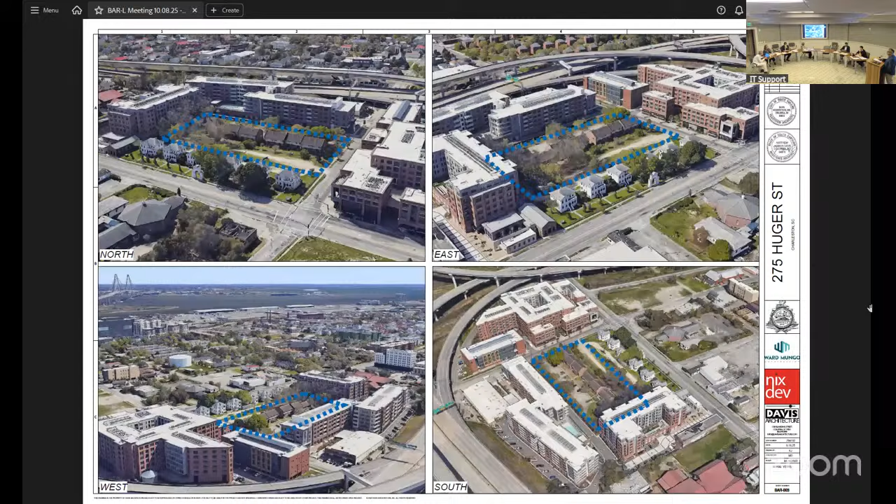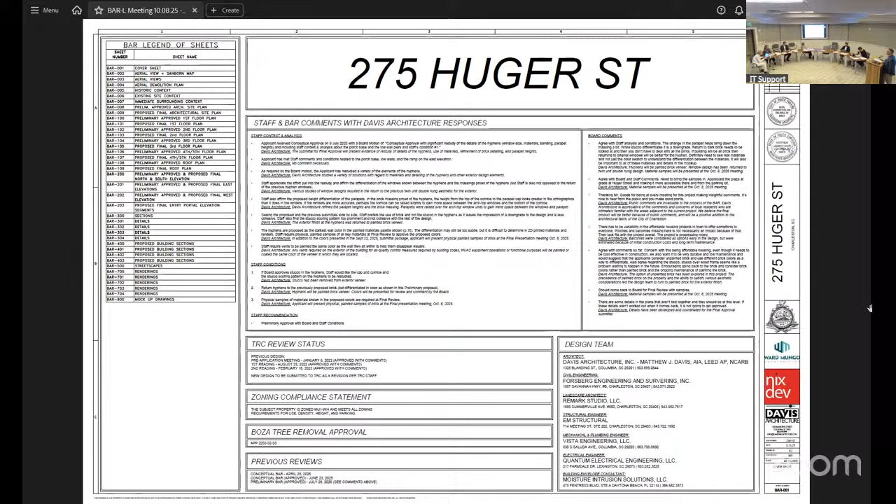So, I guess this is not... it's capricious. Lawrence, can you go back to the front more, let's go through this. Can you go back to page 1? Thank you. Yeah, thank you. So this is not... okay, that's fine. All right, well, you can just kind of take a couple seconds on each slide.

These are the aerial shots, the existing conditions, some inspirations of the architecture of Charleston for the building. Probably a bigger inspiration is the six residences that front Meeting Street that this structure will sit behind and really serve as a backdrop for these homes. These are the immediately adjacent structures flanking the other three sides of the building.

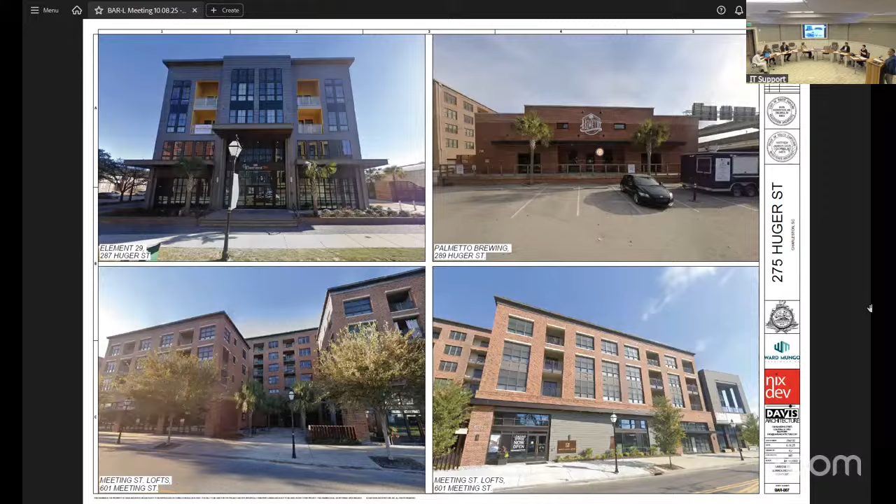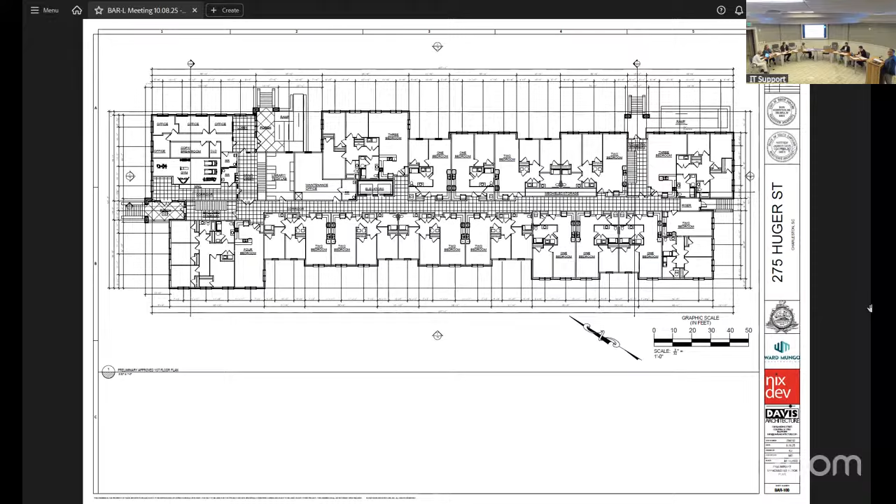So the next 10 slides are basically the preliminary submittal, and then the colored slides represent the final submittal of the floor plans of the building. So you can scroll through those.

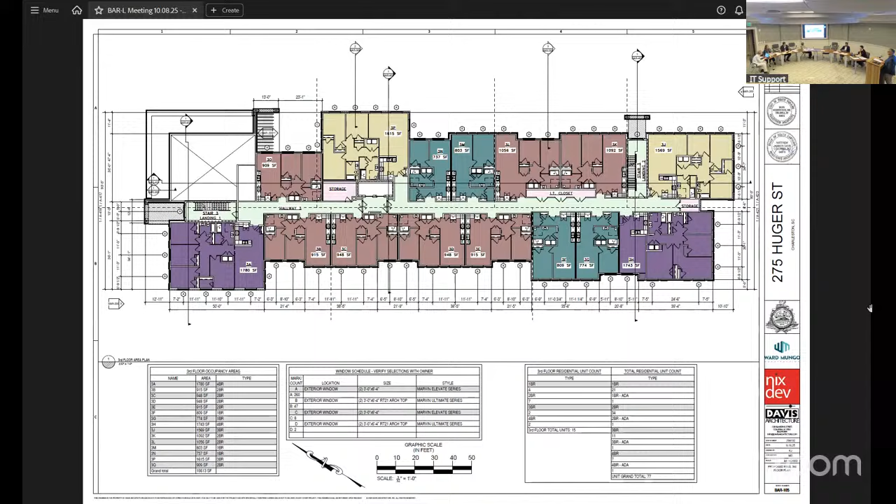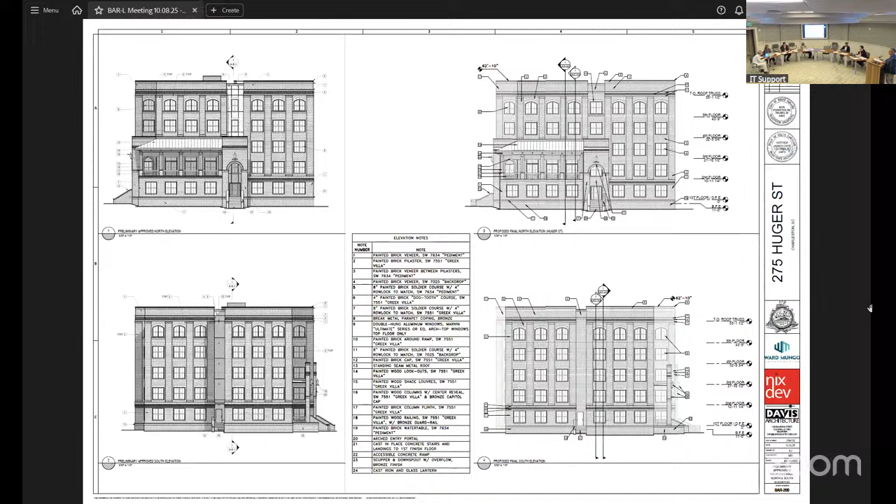So those are studies of the roof plan. That's fine, you can keep going. The next couple slides are the before, the preliminary submittal of the elevations. And then on the right of this slide, are the elevations associated with the final submittal. The next sheet, and then that following sheet, are the long facades.

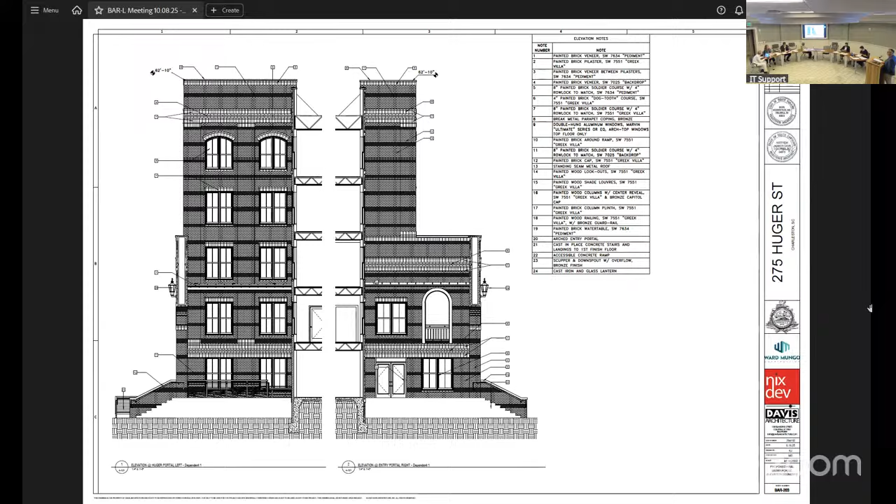Keep going. Some detailed elevations. We started developing more elevations that aren't necessarily visible on the primary four sides of the building. These are the full wall sections, and then I believe that adjacent to the slides following this are basically details of those sections, as we've developed the construction documents to get ready to submit for permitting of the building.

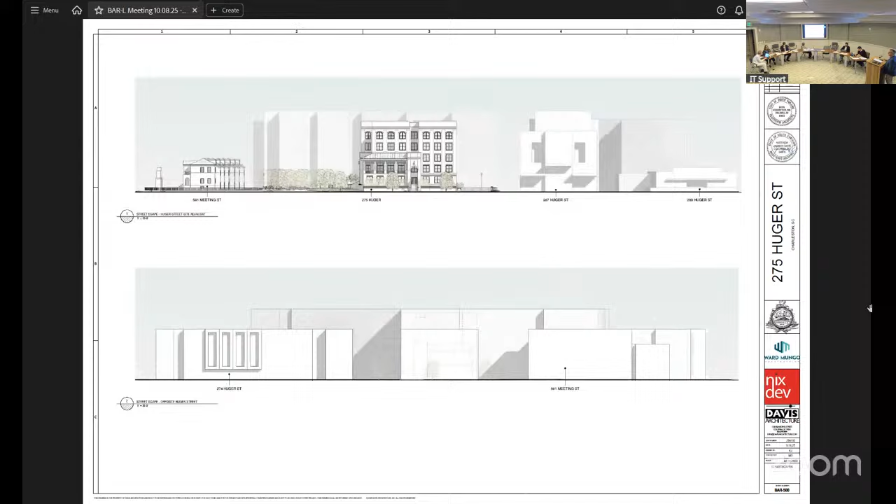And then after this, I believe the final slide for the presentation is the, well, there's some building sections. That's a street elevation.

They're all before and after renderings. So the renderings on the left are the preliminary, the renderings on the right are final submittal. There's a few of those slides. Again, on the left is preliminary, on the right is final submittal.

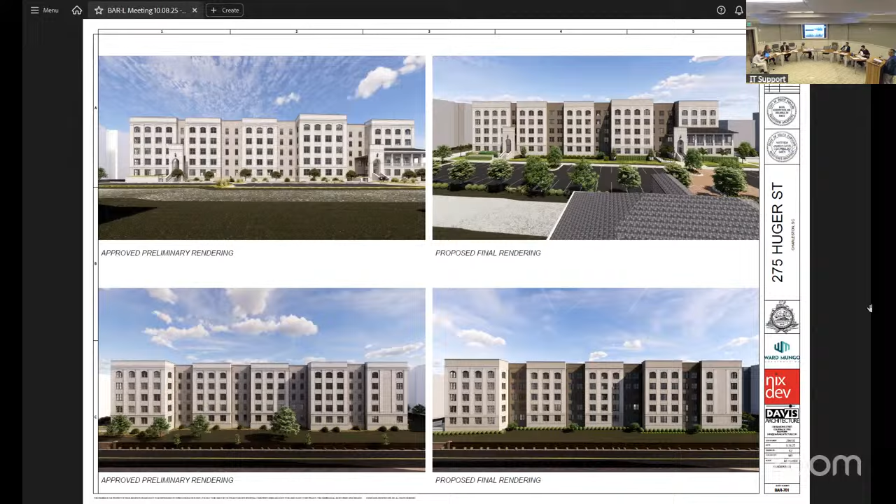And that's the Meeting Street facade. These are all final images. The Meeting Street facade, I'm sorry. And then the corner facade, the rear third entrance into the building is the bottom left corner. The lower right is what will probably be the primary resident entrance off the parking lot, and it's adjacent to the resident retreat community space up on the second floor of the building.

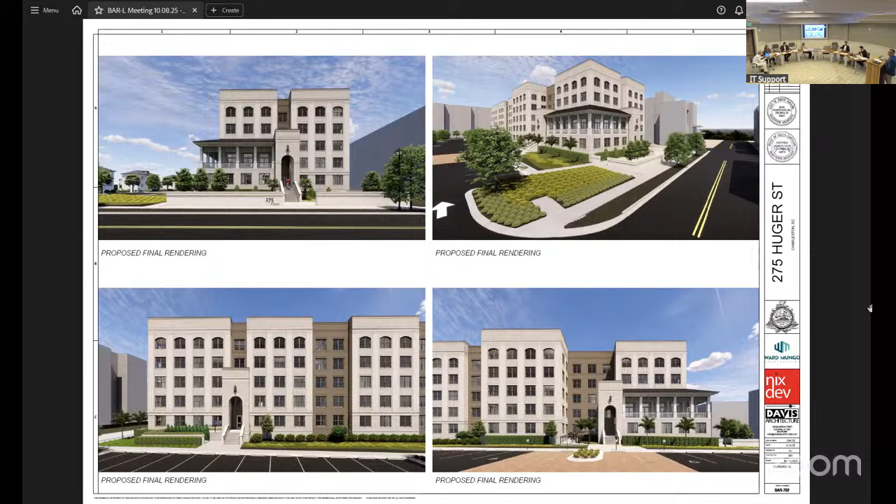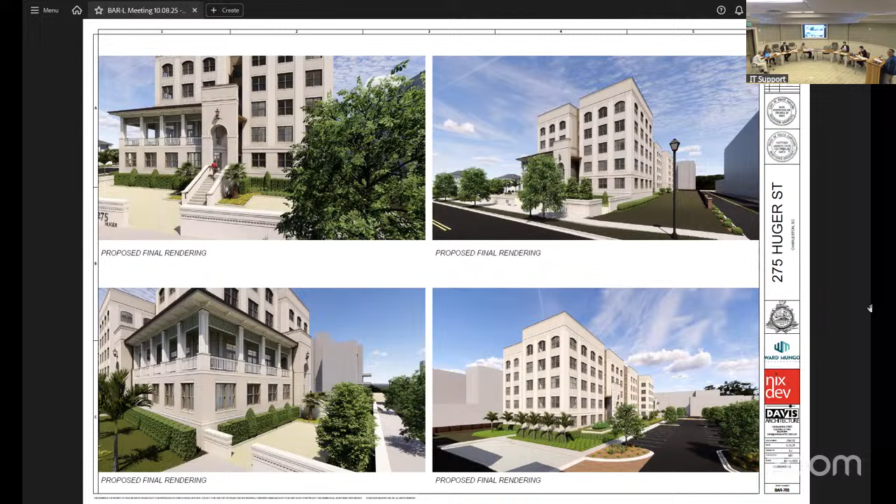A few more renderings of the building. And then this is the final slide for the final presentation.

There is an appendix that follows after this, but it is basically construction details. This is the proposal for the mock-up that will go in place on site. And with that, thank you for your time. We're in acknowledgement of the reality of the timeline of the project. We appreciate you considering this, and we're seeking the final approval by the board. Thank you. Thank you so much.

Any questions from the board? Very quick one: is the top portion, like the parapet, got taller? Okay, yes, as in the development, I believe that may be addressed in staff comments. Actually, it did, in the study of the construction details and the dimensional properties of the brick, the string course actually got a few inches thinner, and the parapet got a few inches taller. So yes, it is a different proportion.

On the lower right-hand corner, you can see especially that it's a little different than the left. I believe that is one of the comments staff is going to address, an issue of reducing the parapet 12 inches in height to return it back to the original proportions. Okay, once again, that was a function of the development of the construction details. Thank you very much. Any other? Yep, go ahead, Mr. Trainer. Comments. Let's go to BAR 501, please, Lawrence.

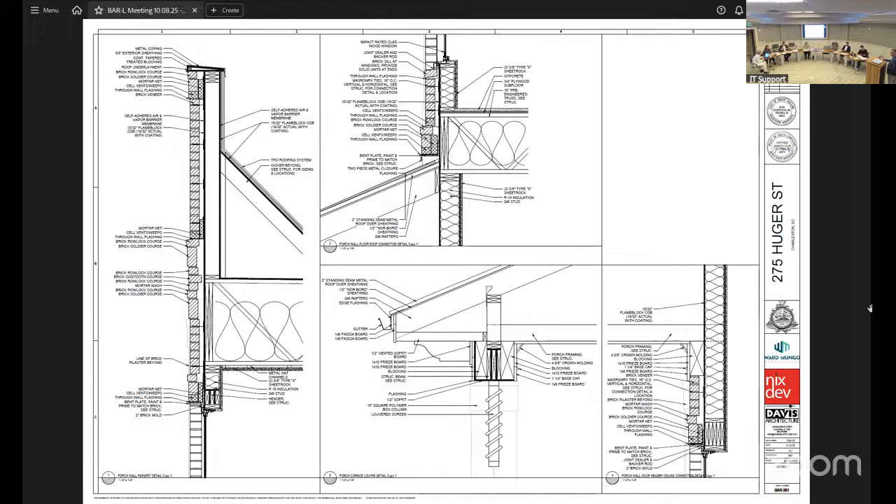It's two different Marvin lines. I think the Ultimate is the arch top windows. All the straight top windows are also a comparable Marvin product. I can't remember the name of it, but both of them are clad. They will come with the same pre-finished color.

Do you see those as the grids between the glass, or as applied grids on the outside of the window? No, they're applied grids, external grids. Doors—

Same line, a Marvin line? Or if you can point me in the set to where these are called out, I just didn't see it, maybe I'm missing it—like the entry doors, what materials they are. Those doors at the moment are Marvin doors.

Okay, pull out the door schedule. I think—I'm not sure if door schedules are on a sheet in this set, it would be in the appendix. Yeah, some of that information was in the appendix, like I remember seeing the windows there, but I can't recall where the doors were.

And I didn't see the railings at the porch in the appendix. That's why I was trying to go through and check, especially at the elements that are really at the street, highly visible, trying to understand the material—like what the underside of the porch was. I had a lot of questions looking at material-wise, specifically like roof—pre-finished aluminum, galvalume, or standing seam. Did I miss those in the set? I'm just trying to find out.

No, it's going to be the standing seam roof on the covered porch. I actually have not settled on exterior painted sheetrock or tongue and groove ceiling on the covered porch yet.

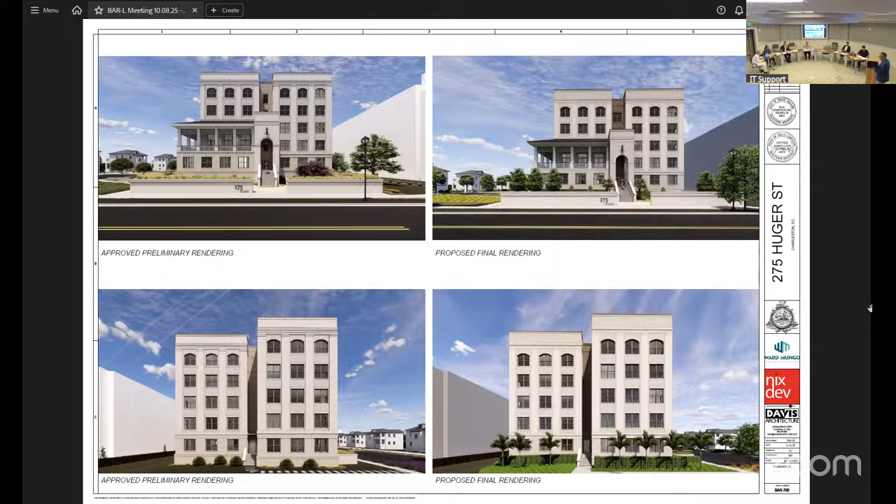All right, city staff, comments and recommendations please. The applicant received preliminary approval on August 13th, 2025. Per previous board and staff comments, staff approve of the return of the hyphens to brick, as well as the return of the previous twin unit double hung windows that were also there.

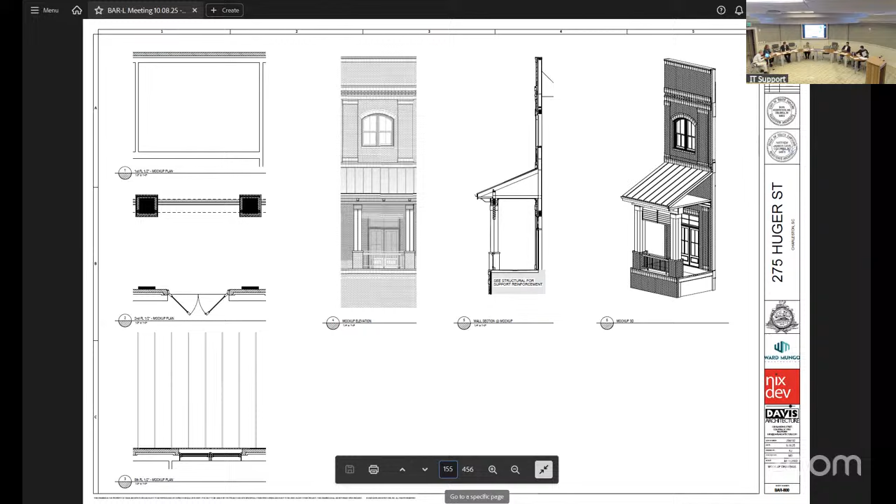Also, per previous staff comments, the applicant has increased the space between the top arched windows and the cornice. Staff noticed that the overall parapet height above the cornice detail has increased. Staff prefer the previous dimension between the cornice and the top of the parapet and request that it be returned.

We're on the previous page—I just have one more on that one. Even with lowering the parapet to the previous height, staff do not believe the rooftop mechanical units will be visible, and therefore do not need additional louvered screening.

The proposed mock-up of the structure shows the most complex moments of the design. Constructing what is shown with excellent workmanship is sufficient for review of the building design. Note that all paving and hardscape materials will need to be added to the mock-up panel review for board and staff review. The applicant was directed to bring final samples to their final review per previous board and staff conditions. Therefore, staff has no updated comments related to the painted brick prior to viewing.

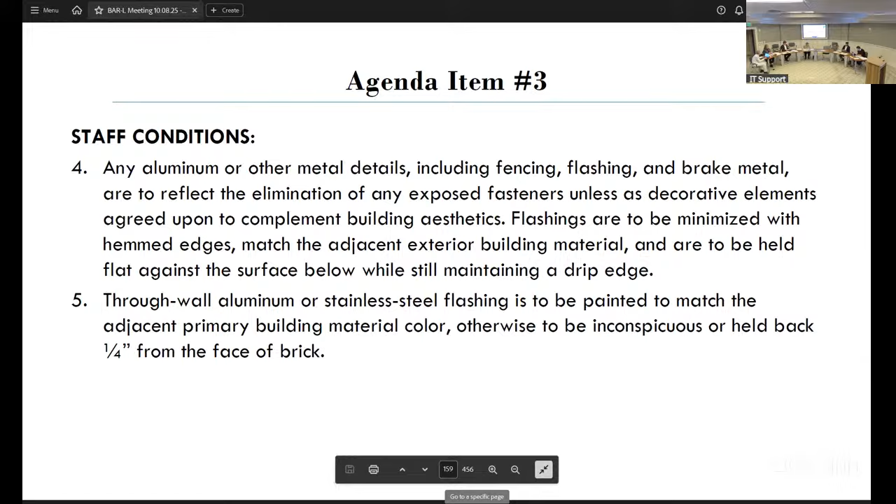Number 6, exposed windowsill flashings to match the color of the expressed building sill and not the color of the window. This flashing is to be held tight against the sill, be set in a bed of mastic, and not project out past the face of brick or other material at the jamb. Windowsill flashings over a row-lock course are to be held back to the face of the wall at the jambs and set in a bed of mastic with a hemmed edge to remain flat.

Number 7, all brick flashings are to match the generalized wall color. No stainless steel or mill finish flashing is allowed.

Number 8, all construction work is to consider adjacent or nearby structures and the protection and monitoring thereof. I know you're not driving piles, but still we want to be respectful of everything. And if you think there's going to be something that's going to impact the historic structures nearby, you would need to meet with staff and discuss.

Number 9, all visible exhaust and intake grills and vent caps are to be flush style and painted to match the generalized adjacent exterior material color to be inconspicuous. Where occurring in numbers, these are to be carefully organized in rows and columns so as not to be visually disruptive.

Number 10, all visible plumbing equipment mounted on or extending through exterior walls is to be painted to match the generalized adjacent exterior material color to be inconspicuous, unless pointedly decorative. The location of the gas meter is to be carefully thought out and as hidden as possible, with only the first stage regulator on the exterior and the remainder within the building.

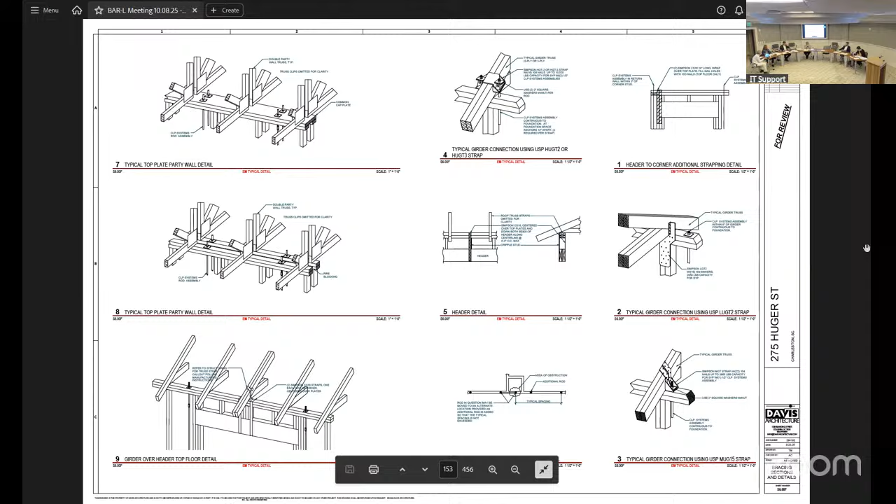Sorry to interrupt, Mr. President. You could go back to the mock-up drawing and condition additional things you want to make sure are in it. That could work because that's the last time the board sees it. If there are specific conditions you want the board to review at the mock-up stage, Mr. Davis, do you have any idea what page the mock-up would be on?

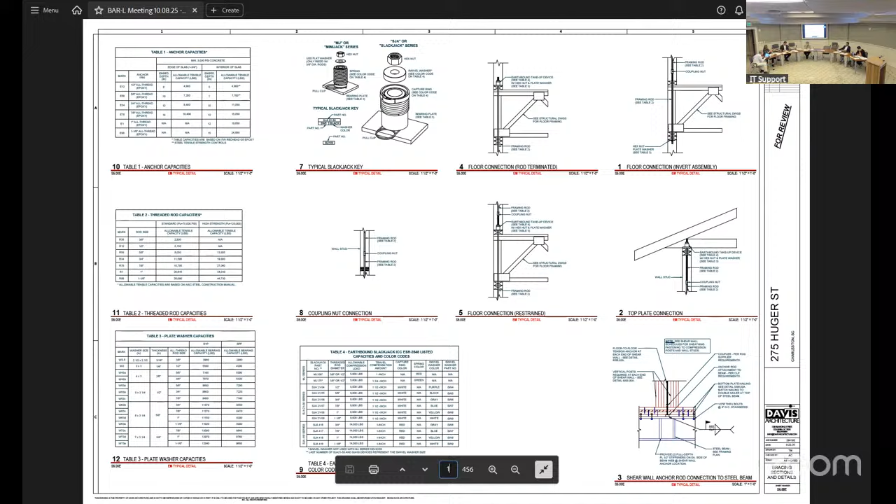Page 39, look at that, BAR 800. Yes, it's BAR 800. Okay, so that's another way the board looks at it again at the mock-up level. You could condition different things to be in the mock-up and have them submit a new mock-up drawing that the board approves. So what's going to be in the mock-up?

The main element I see missing from the mock-up is how the pilasters, the vertical elements, meet the base. Right now we've got how the building meets at the porch, but there's not the element of how that meets the base. And in plan, the offset of how those elements work in the sections, I don't see enough offset that looks like it's going to represent what's in the rendering.

So you could condition that be added to the mock-up, and we will be seeing mock-up drawings again. So that will be when we need to see it more complete, I guess. Yeah, because this proffering was so you guys could comment on what you want to see in the mock-up. I'm sorry about all the comments, I'm relatively new to this process, so I want to make sure I'm not over-approving something I'd later wish I had seen.

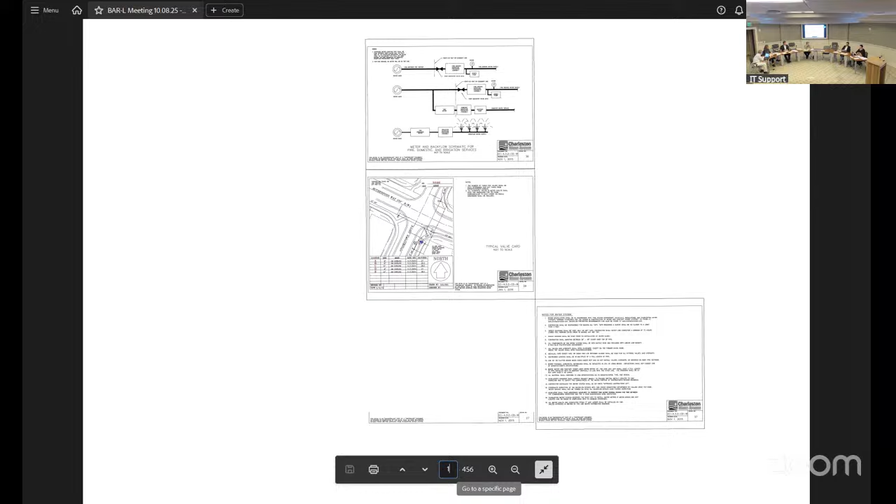Thank you. I'd like to point out that we reviewed this project quite a few times, and so far everything was done as we asked, including the change of material, the hyphens, and the change of size and shape of the windows. So architecturally, it's come to the point that there's nothing else we're asking for. As far as constructability and the permit set, we have one more step, and the final step will be the mock-up.

Just to clarify, I would echo those comments. I think the project has moved forward very nicely, and y'all followed the comments from staff and the board. I would be comfortable with the staff recommendation for final approval of board and staff conditions and comments, and final review by staff.

Wait, did you make a motion? No, I did not, I just said I would be in favor of it. I'll entertain a motion then, y'all don't have any more discussion? I'll make a motion for final approval with board and staff conditions and comments, and final review by staff of permit drawings, including the expansion of the drawings with details discussed for the mock-up plan.

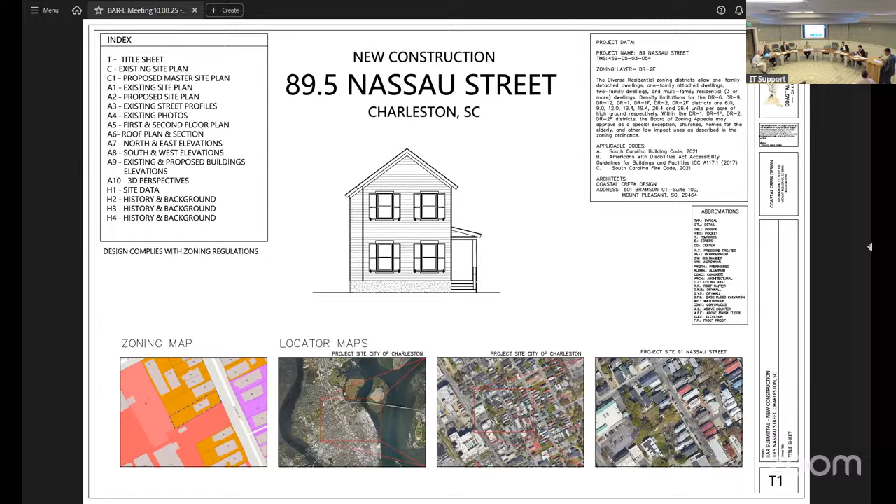Can you put the overall site plan up? I think that'll help us. Yes, this right here. Thank you. Is that the one you wanted? The one before, next one, a little larger will be better. No, all right, thank you.

Thanks, Joel. Before we get into the overall site layout for that campus, I just wanted to give a little bit of background on the mission itself and how it then ultimately relates to that site plan.

Since 1904, Star Gospel Mission has served the Charleston community by providing safe and transitional housing for vulnerable individuals and families. In 1920, the mission moved to its current home at 474 Meeting Street, where it continues its longstanding tradition of offering hope, support, and a Christ-centered environment. Over the years, the campus has grown to better serve men, and now even more recently, women and children, offering not just shelter, but a chance at a new beginning.

As we are all aware, today that mission remains as vital as ever. In an effort to continue to meet that growing need of transitional housing and to enhance the safety, dignity, and environment of our campus, we come to the board to ask for several approvals for our proposed projects. Star Gospel's overarching mission for this project is designing and building a project that provides a dignified and welcome space anchored by faith and attainability. We believe this site layout is essential to allow for campus improvements, expanding our housing capacity, and ultimately increasing our impact on Charleston's most vulnerable.

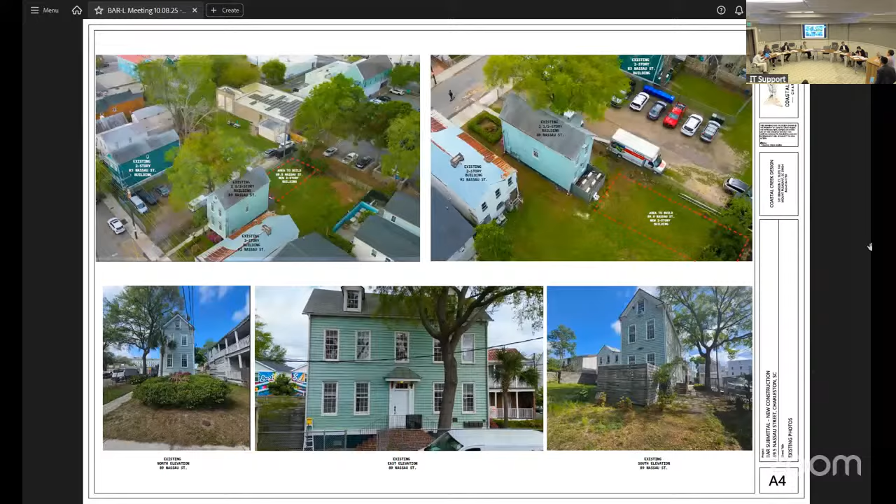Looking at 89, if we could go to the floor plans, I think we're looking at 89.5 here. Next one, back up. I guess you could say those are context photos, existing site plan. So we'll go to the next sheet, which is proposed.

You can see the existing small structure and proposed structure. I understand both of these houses at 89 and 91 were relocated to those lots. They weren't original to them, but they're original and historic from other locations, being preserved. The house at 91, the existing house, is currently under renovation, and we're looking forward to seeing that completed. So if we can flip through to the next slide.

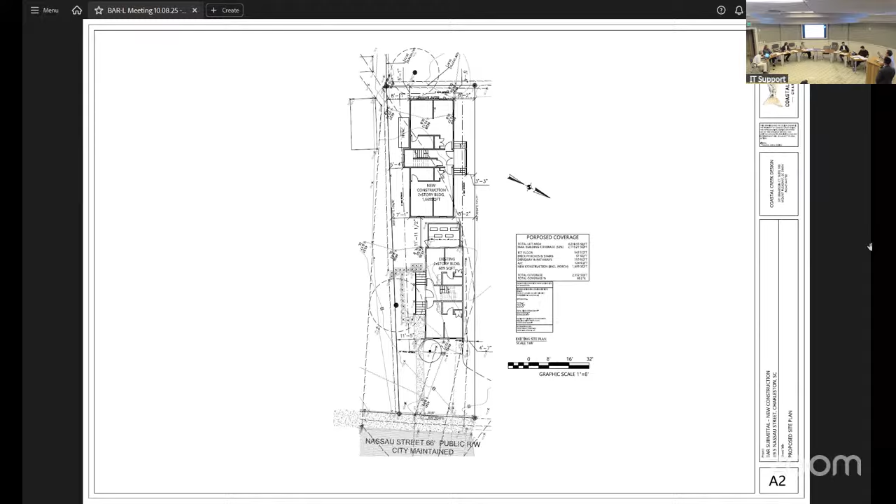Okay, here we go. So what we are looking to do on the property is create as many units as we can to house these people. Each unit is 320 square feet. So it is not looking at luxury living, but accommodating what is necessary. And I think it's very important, when PJ speaks of dignity, that people have a place they can go to where they're comfortable, feel respected, and can rebuild their lives.

These units, as compressed as they are, have a main building width of only 17.5 feet. You've got this small living area, an area with the bed, which can have a bunk above it, an area where you can store some clothes, and a small bathroom. That is it. These are, again, 320 square feet, not looking at luxury.

I think our largest issue with building behind a historic structure is the need for subordination with height and all of that. Looking at our program and our need, we're at 17.5 feet, which is pretty narrow, but then we've got the porch and a little bump-out for circulation and stairs to get to a second floor. Overall, when you look at our proposed elevations, you'll see these buildings are slightly larger in width than the historic structures in front. But I don't see how these get compressed any further, because we don't have the ability to lengthen them to fit directly behind. So if we can go to our next slide.

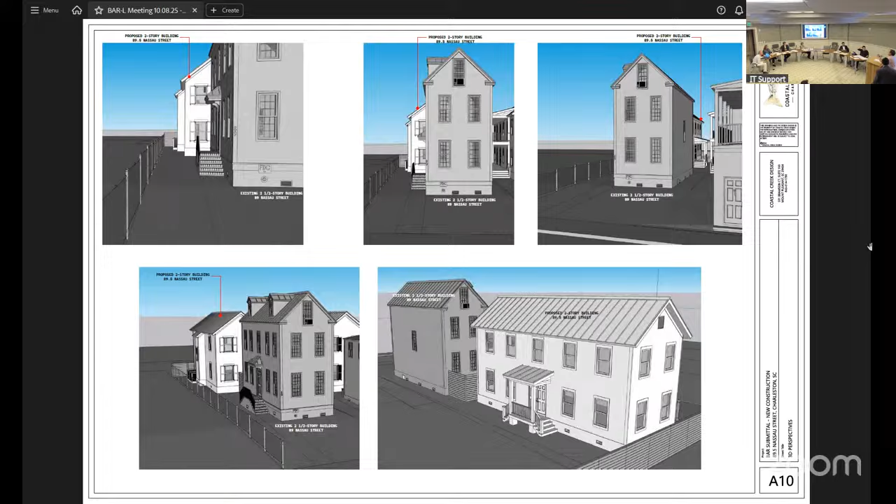Yeah, if you go to the site plan... I think it was just, proposed, oops, sorry, next slide. Well, that one hasn't. No, it does, yeah, so I think it was just a relationship of this entry to that entry and those 2 units. But if the desire was for that thing to mirror 180 degrees, we are fine.

I didn't know if there was a use or security issue for those, the 2 front structures have the entries on the other side. Is there a use or a particular specific reason? It was just us looking at the entries being on those 2 units across from each other, but certainly have no issue being consistent as those properties go.

And so to your point, yes, we were trying to preserve some safety, having everything open into, I'm gonna use the word alleyway, but for lack of a better term, maybe a courtyard, to the interior. If we could take 89 and turn it around, we would have, because then it has this courtyard and everything opening in the same direction.

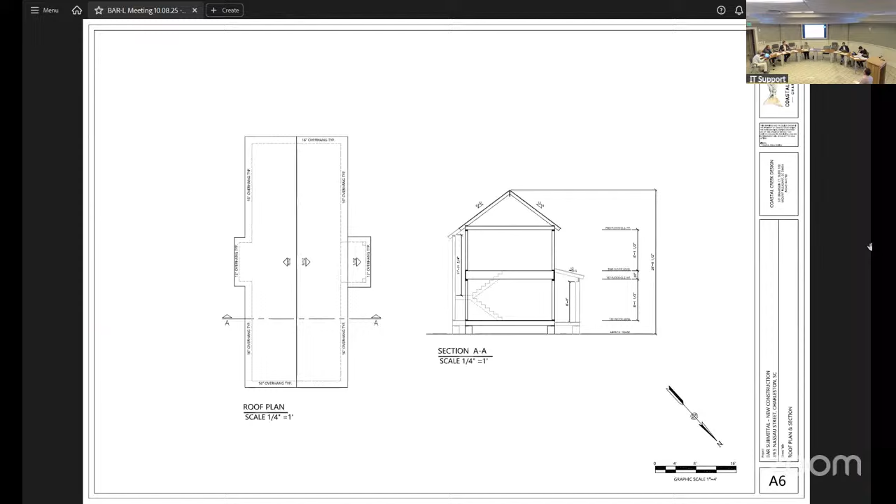This project involves the construction of 4 new structures across the site, as we've seen on the site plan C4. In a prior meeting with city staff, the applicant was requested to outline the phases of the total project to the board prior to describing the specific submittals before the board tonight. And as already noted, item B4 will receive the address 89 B. It's just not currently in the system.

City Council passed a resolution on January 24, 2023, establishing the priority status affordable housing program that provides special benefits and advantages during the development review process to residential and mixed-use developments that make certain impactful contributions toward the city's supply of affordable housing. This project comes under the auspices of this program, and you have to register — you just can't claim you're doing it. They are registered. Thus, while in general the board does not consider cost when deliberating on projects, the BAR must balance the priority status affordable housing program with maintaining quality design for all residents in all types of housing situations.

The ordinance states: additional buildings and additions to buildings that are subject to the jurisdiction of the BAR shall be subordinate in height, scale, and mass to the primary building, provided this provision may be waived by the Board of Architectural Review when it deems such appropriate based on architectural merit and context or existing lot conditions. The historic building in front of the proposal is not rated in the architectural inventory and dates from 1852. The applicant's proposal is subordinate in height to the historic structure, but its mass is visible from behind. The architectural direction is modest and in keeping with the Charleston vernacular of the context.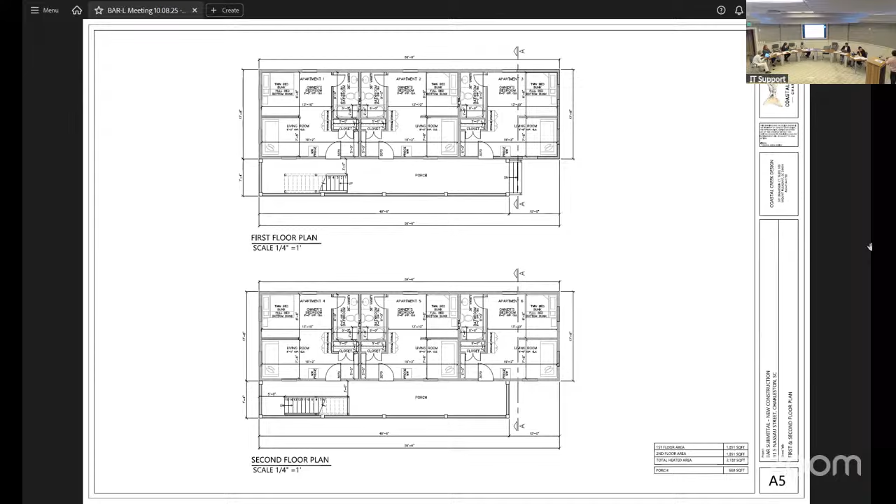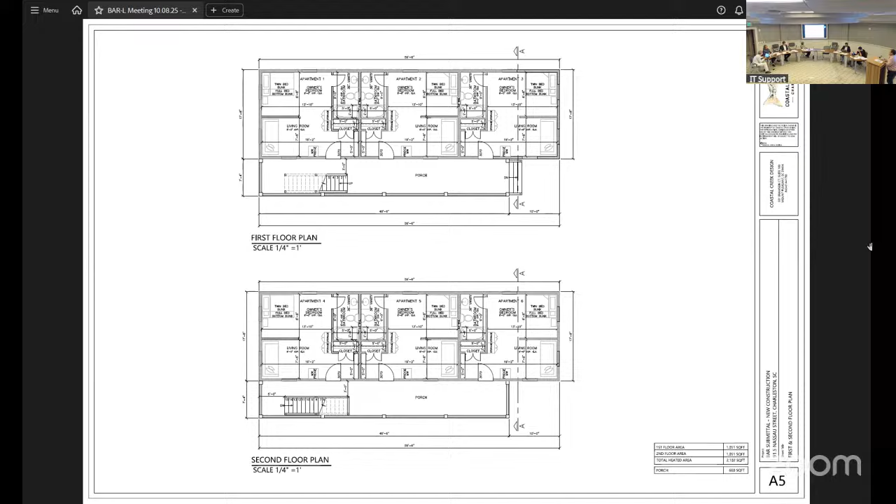And our next slide probably shows the floor plans. Floor plan wise, not very different here—it's basically just taking the two and adding a second, third unit to it. So we have the same units we just looked at, 89.5 width-wise, two of them together, and then a third has been added to it. The double piazza allows these residents to have some outdoor living space and be able to get up to those second floor units.

Our next slide, please. So here again is the roof plan and then the building section. As I mentioned, this house is not in a flood zone, so we will lower that first floor, that foundation, which will definitely help when you look at our site elevations showing the existing structure and then our proposed. So we'll go to the next slide.

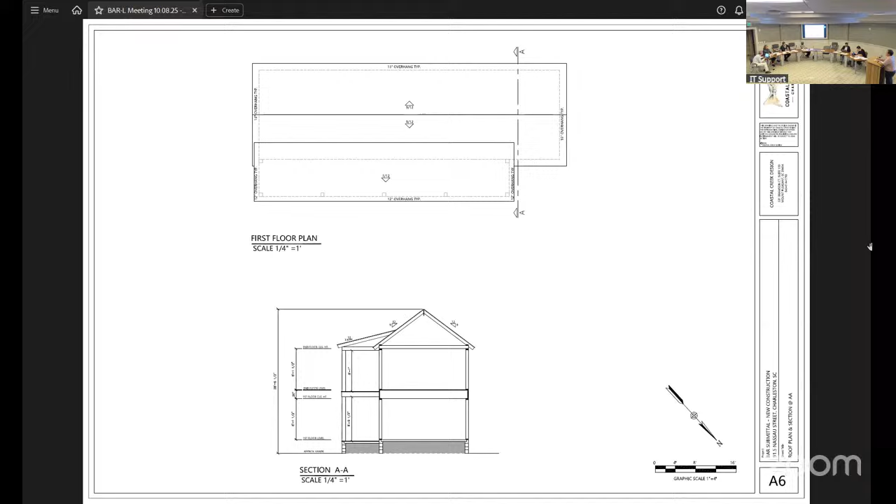There's the proposed front elevation of the side. There's not a whole lot of excitement to the side elevations on these. Next. Just let you take a look at that—the piazza, those entry doors—and then the next slide.

So this is the one that shows the amount that it projects past. Again, we're dealing with 91 Nassau, which is much smaller. When we lower our proposed building foundation, this ridge will be equal to—I don't know that it will be subordinate to this one, but it would be at least equal to the front building. And then it's for the most part really just the piazza that pushes outside of the footprint of that front house. I think that probably is probably enough there, if not to answer questions you already have.

Thank you. Did you say that this one can be lowered? It can be, yes, because this one's not in the flood zone, it's in the X zone. So we will be bringing that first floor down, which is what will allow for this ridge to drop. Obviously, from a street perspective, you're probably not catching that little 12-inch or so difference in the ridges, but as you're on the site, you certainly would know.

And that scale and massing—unfortunately what we're looking to do is try and get as many units as we can to help people. So this building certainly is larger in length than this, but if I can at least pull it down by lowering that foundation, I'm starting to move in the right direction.

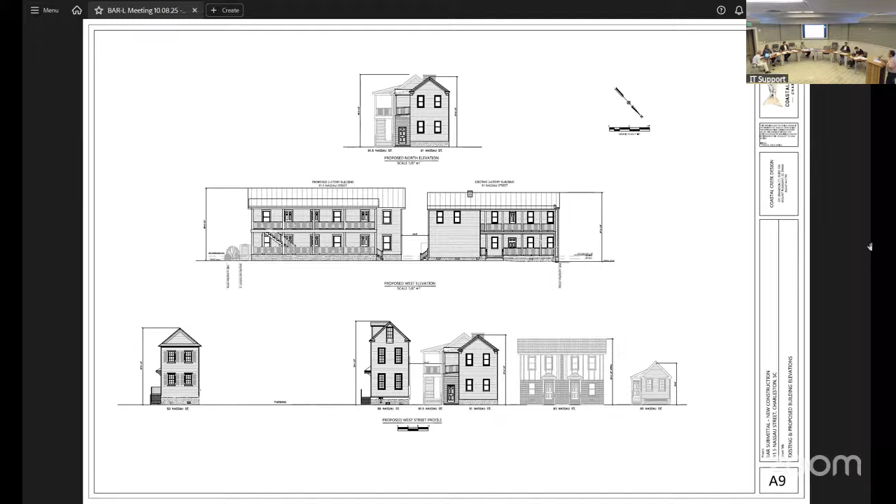Sure. Our first piece of comments are literally the same as the last one, in part because comments follow individual properties. The only difference here is that this address will become 91.5 Nassau. The second page—I won't repeat the ordinance that I just stated.

New information: this historic building in front of the proposal is rated 4-negative in the architectural inventory and dates from 1852. Per definitions in the inventory, a rating of 4-negative represents the lowest level of resources surveyed. These resources are heavily altered from their original form and materials. With further alterations, these resources might lack sufficient integrity to be included in the inventory.

The applicant's proposal is taller in height than the historic structure, and the piazza is visible from behind. The architectural direction is modest and in keeping with the Charleston vernacular of the context. Similar to last time, staff encourages the applicant to study if the building could move north against the lot line so that less of the new construction would be visible from Nassau Street. Staff deem it appropriate to waive subordination in this case for the design shown in this application.

We have no staff conditions, and our recommendation is conceptual approval with board conditions and comments and staff comments. Thank you so much. All right, any response?

No, we'll definitely study everything. I won't. Sure, yeah, just.

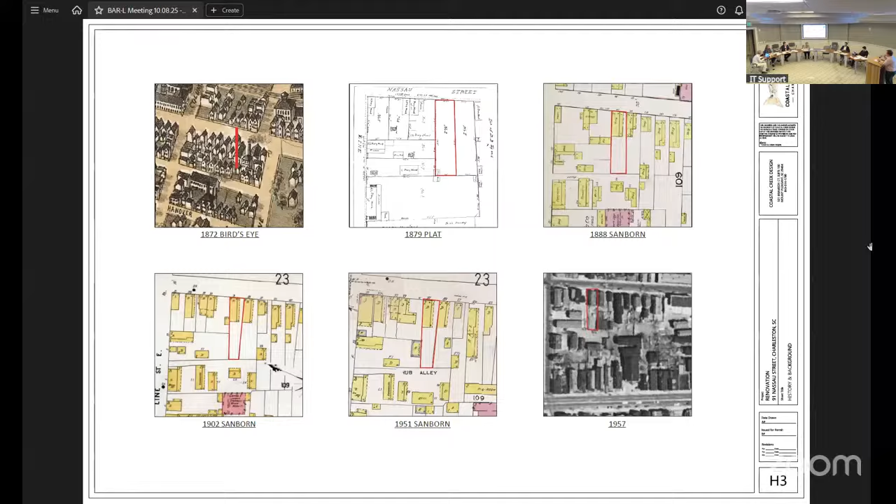Sorry, but if we go to the site plan sheets, I think on the encouraging to move. My memory serves me correct that we've got this house at the right side setback line. We positioned this house at this 3-foot side setback line because of these adjacent properties here that we don't have control over. We have control over this area, which is why we allowed for that piazza to move left, and we did receive zoning approval for that to extend into that side setback.

Thank you for that clarification. I appreciate it. All right, full discussion.

Quick question about that piazza - I understand what you said, that maybe residents want to have a little bit of outdoor space. At the same time, in terms of visibility from the street, what you see is pretty much totally that piazza. If you change the stair to a scissor stair at the end, you can reduce the width of the piazza, and that helps to stagger that visibility, I think. But that's a programming issue.

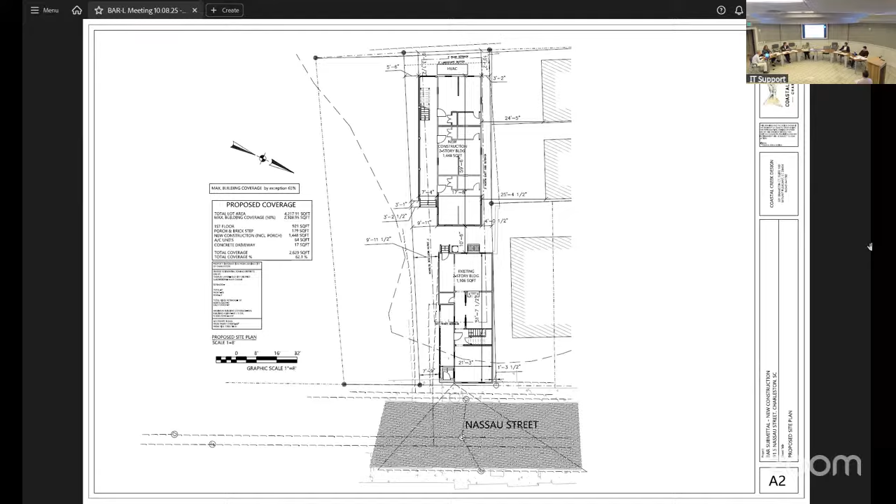Conceptual approval with board conditions and comments and staff comments. Is there a second? Yeah, I second. Okay, Mr. Trantham, how do you vote? Yay, in favor. Mr. Brown? Yay, in favor. Ms. Chuck? I'm also yay, in favor. Motion passes. Thank you all.

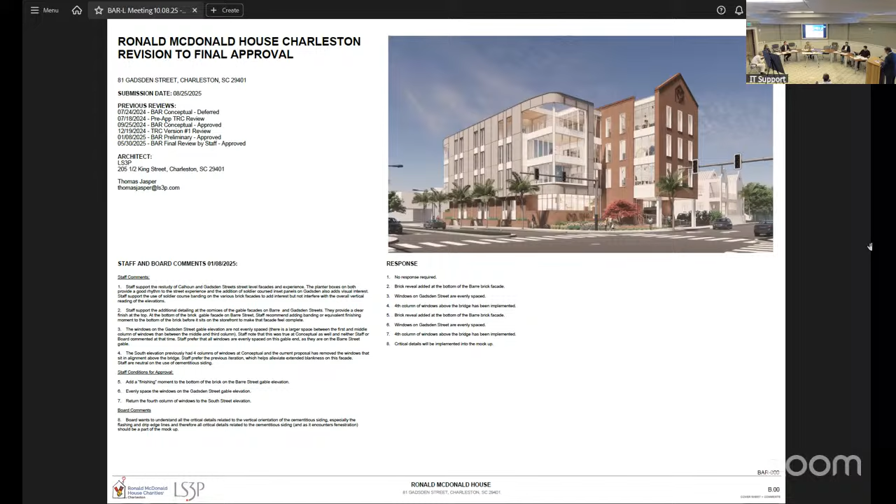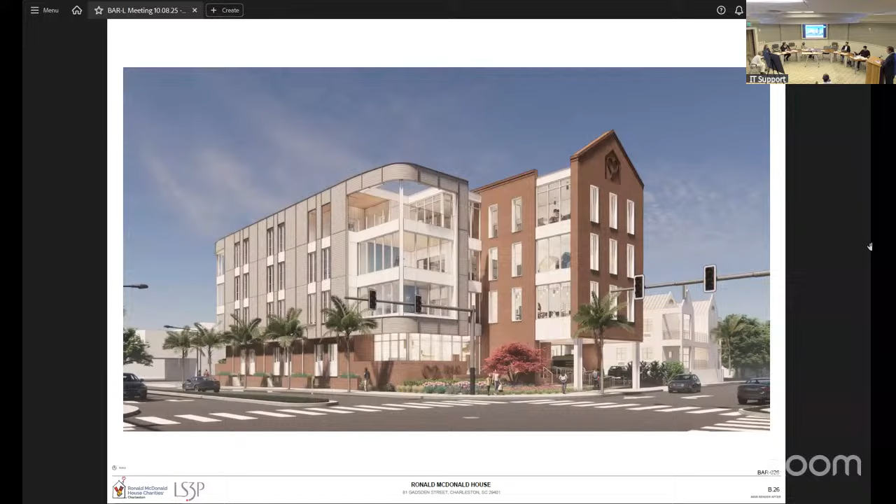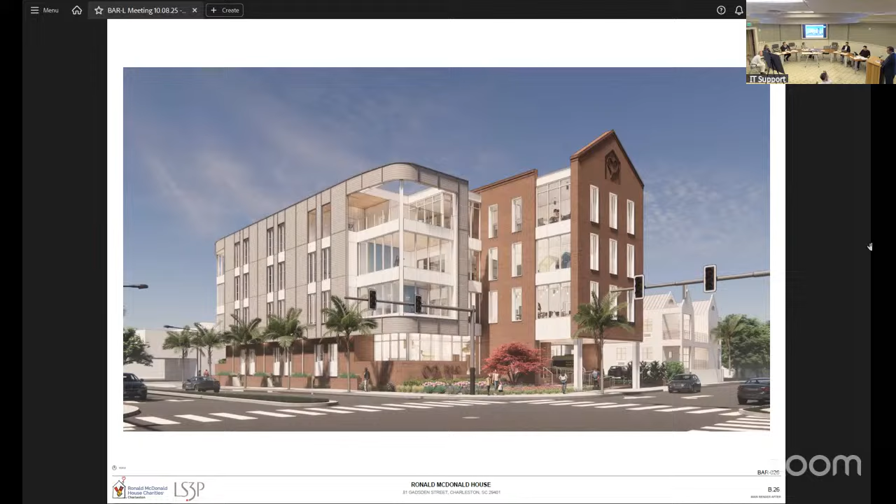If you'll go to sheet 27. There, that's it, that was before. And if you'll toggle back to 26, that's after. So I can tell you at our last meeting, the only comments we got from Historic Charleston Preservation was, can we take a floor off? We met with Historic Charleston Preservation and they're so excited. So I sent you a letter. That's where we are. Thank you.

Any questions? The only question is the siding hatch direction of the cementitious siding changed between existing and proposed. Is that a rendering difference or is that intentional? One is horizontal, one's vertical.

I didn't introduce myself, David Burke, LS3P. Thomas Jasper, LS3P. Yes, that was a change that did occur. So we presented this for preliminary approval back in January, and over the refining of the design and our staff approvals, we did make some small revisions to the facades. That was one of those, mainly because of constructability, dealing with water infiltration of the siding and so forth. So in order to drain behind that siding, it was just easier to go to a horizontal siding. And there was additional glazing added to the south side of the building towards the current structure.

On which part? On the south side, looks like it went from... Do you have a page number? Oh I'm sorry, yeah, 16. I think that was a request by staff in the last submission. We had removed a vertical set of windows above the bridge, and the staff had requested them back. Yep, that was a staff request.

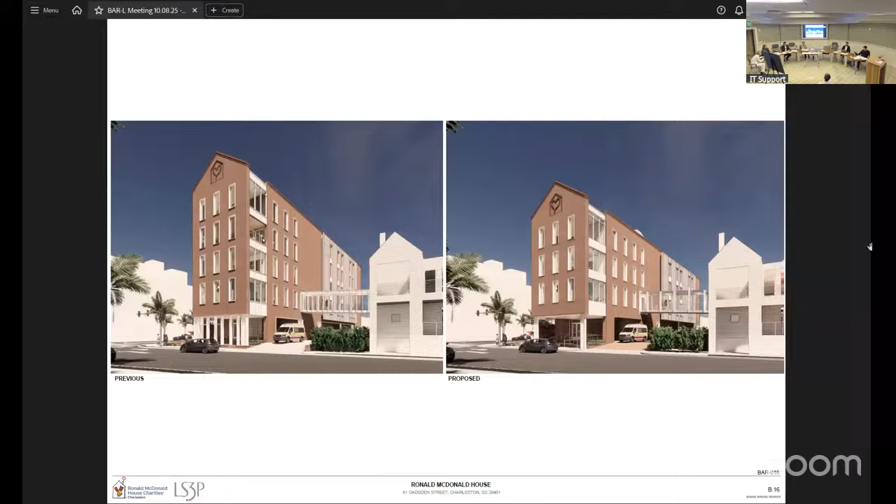Okay, all right, any other questions? All right, thank you all. Any public comment? We got the letters. All right, city staff comments and recommendations, please.

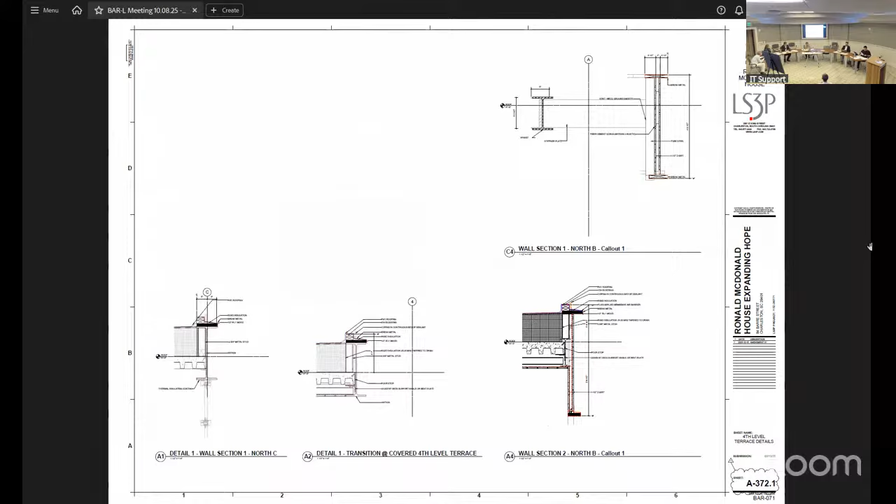The applicant received preliminary approval with final review by staff on January 10th and final approval by staff on August 29th of this year. Staff met with the applicant prior to the submittal and sympathized with the unexpected financial situation that has impacted the design. While removing an entire floor from a design would often negatively impact the proposal, in this case, the proportions of the design work well and staff support this major change. Staff also support minor changes reflected in the submittal, for example, the switch of planter boxes from a combination of metal and brick to all brick.

Staff conditions: any additional future changes to the design must be reviewed by the BAR. Staff recommendation is for approval of revision to final approval with any previous conditions staff had made, and final review by staff before permit drawings.

All right, thank you so much. Any response? Other than to say I spoke to Ken Granada about this because of the unusual nature of it, and he said just send through whatever he's approved with bubbles. So we're going to bubble the set to show what changed. Thank you.

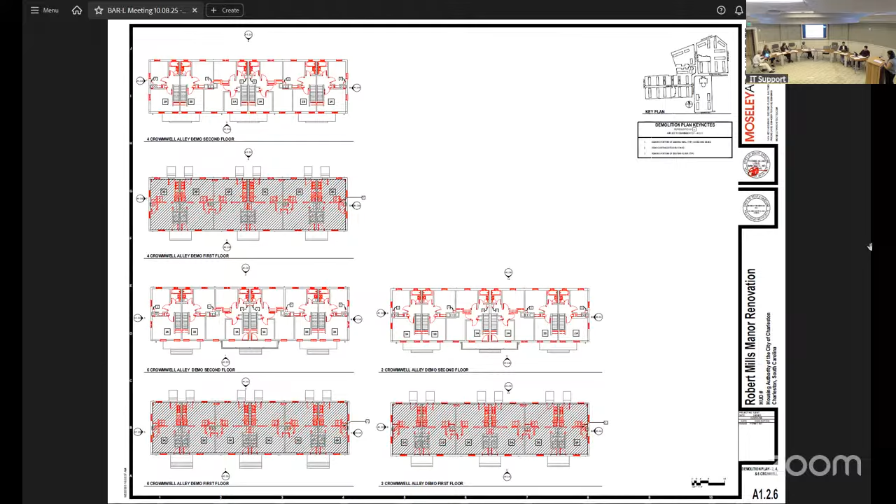The windows were replaced, I think. We have records of the replacement of all of these windows. They're in bad shape. They are wood single divided light windows. We plan to put those back.

Single pane divided light windows. And the doors, the current entry doors are like a 6-panel metal door, so that's what we will be removing.

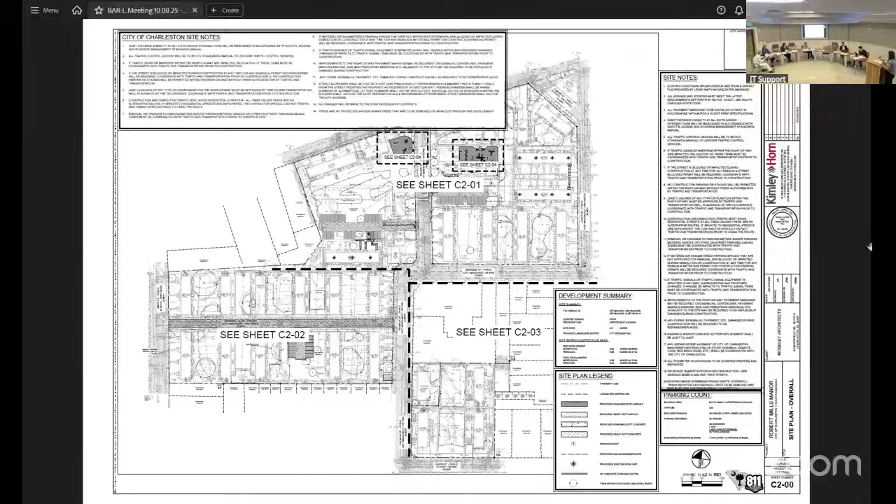Okay, so this is the proposed site plan. We can skim through this as well and get to our bulleted scope of work list. This one's a little harder to read because there's so much, but we didn't want to leave anything out.

Building exteriors in general, we are replacing exterior doors and windows. We are repairing or replacing screen doors in kind. We are replacing louvers in kind.

We have a big roof scope on this. We're going to remove all the clay tile, repair the deck, put new underlayment down, flashing, etc., and then put those clay tiles back on.

This housing authority did not want to spend this much money on interior renovations and have a leaky roof. Even though they put millions of dollars into that roof in the last several years, they went ahead and put this in the scope.

So there's a lot of repair items on there. We did survey every single building, and the elevations that you saw in the package had keynoted any damage that we had seen in our surveys, and those were specifically noted.

We will be replacing crawl space access grilles in kind, cleaning the facades, porches, and ramps, repairing and painting wood fascia, trim, framing, anything that would have been previously painted, and repairing and replacing metal gutters and downspouts. So essentially, we're just repairing everything that we haven't already said we're replacing.

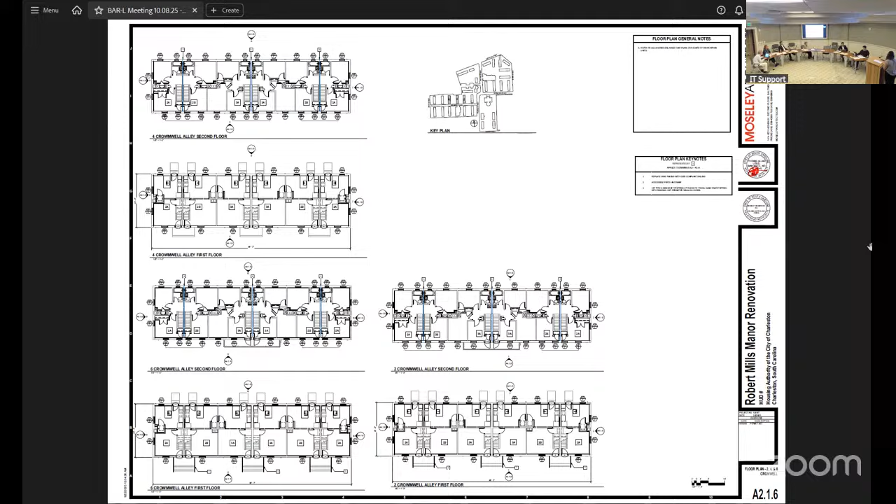We did receive conditional approval from SHPO for historic tax credits. So you may have seen on that slide their comments for our conditional approval on this scope. And these are the plans and elevations that show the new unit plans and proposed work to the elevations.

For the antebellum buildings, I want to specifically note that this is a conservative repair-in-kind effort to restore the existing structure. On the exterior, the scope includes repair and painting of existing windows, doors, louvers, slate roofing, stucco facade, and wood trim. On the interior, it's more of a preservation, repair, and refinishing of historic elements.

We are not doing as much demo or removal as we are on the 1940s buildings. We are proposing to add one exhaust fan vent and one dryer vent per dwelling unit at those antebellum units, and we're making every effort to put those vents on the non-primary facades. Sometimes we're not able to do that, but that was always our goal, and we've spent hours with the engineers trying to work through that point.

I think we're close to the end of this. Yeah, there's only one more slide. So with that, I just wanted to say thank you. We're requesting, again, our large conceptual approval, and I appreciate your time and I'm open to questions. Thank you very much, a lot of stuff and very efficient, so we certainly appreciate it.

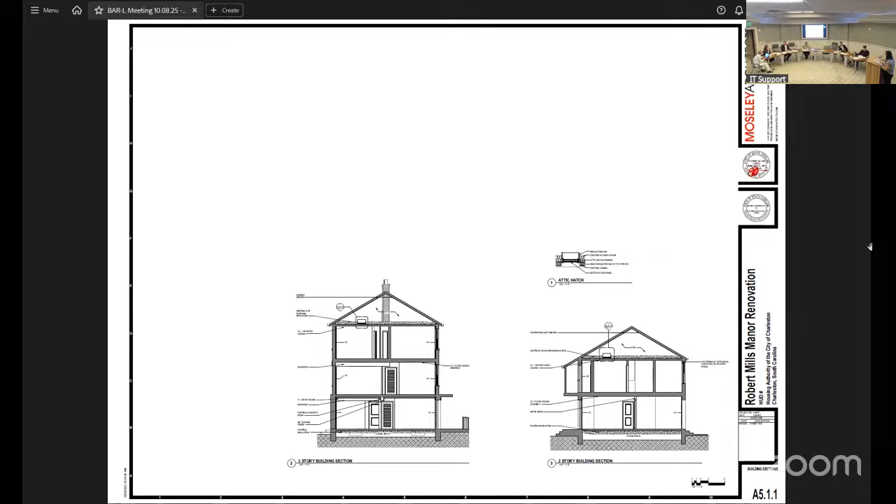Question from the board: would the vents and exhausts for all of the other brick masonry buildings also be on the non-primary side? As much as possible, but some buildings don't actually face the street, some have entries facing a courtyard on one side and the street on the other, and those are the primary entrances for the units. In those cases, we're still trying to get them to the courtyard side, but there are some places that are quite impossible to work out. It's more of a modernist building site plan than a traditional urban one, so it's not possible to have them all be backs given how it's laid out.

And then the ADA accessibility on 20.1 - all of those units are accessible, and that's where the addition of all the extra ramps will be. There are 3 buildings where the first floor is flats in a stacked configuration and the upper floors are a 2-story townhouse, so not every door needs a ramp. They were all small units before, and we're trying to provide some larger, like 2 and 3 bedroom accessible units on the site to mimic the range of unit types we have. We actually reduced our unit count by 4 with this project, so we didn't need all the ramps that had been there previously, which felt like there wasn't much thought into how they were laid out. We're trying to clean that up with the grades and everything we're working with out there.

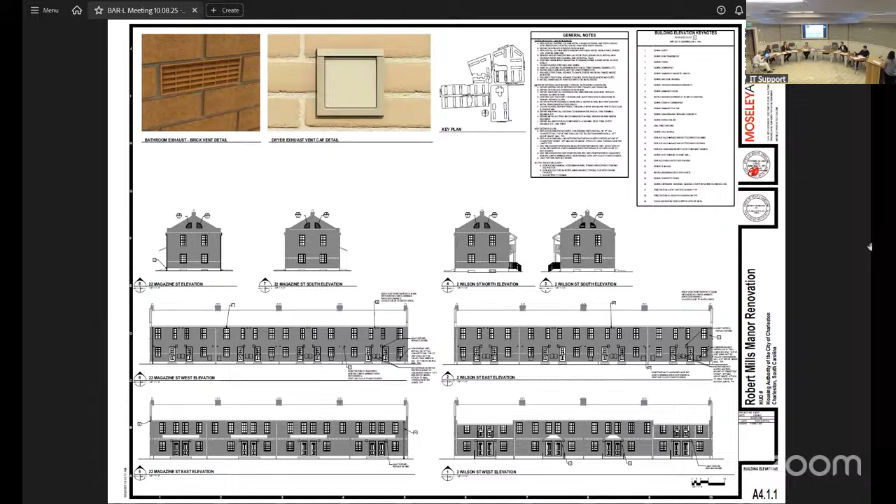I just didn't know if there was another configuration that didn't have so many ramps associated with the facade. It's the last slide - they're rendering the perspective view of those. Which one did you say it was, Joel? 20.1, the very last slide. I think one more down. Yeah, there it is. Oh, these are... okay. Just seeing what you're saying - significant increase.

I don't think there's a way to combine these 2 doors - if you've got 2 doors paired, one goes up and one is a flat, so you can't really make the unit above the first floor accessible that way. I don't think there's a way to combine the ramps off the top of my head to make it less, and nobody hates all of those ramps more than me. But we did make an effort to try and make them similar in configuration and have some repetition.

What are the elevations of the first floor over the grade? They vary per building - it can be anywhere from about 8 to maybe 30 inches above grade typically. So you look pretty long. Yeah, these buildings aren't quite 30 inches above grade, but it looks pretty tall, and the ramps are really short. I guess we will see in preliminary what you do.

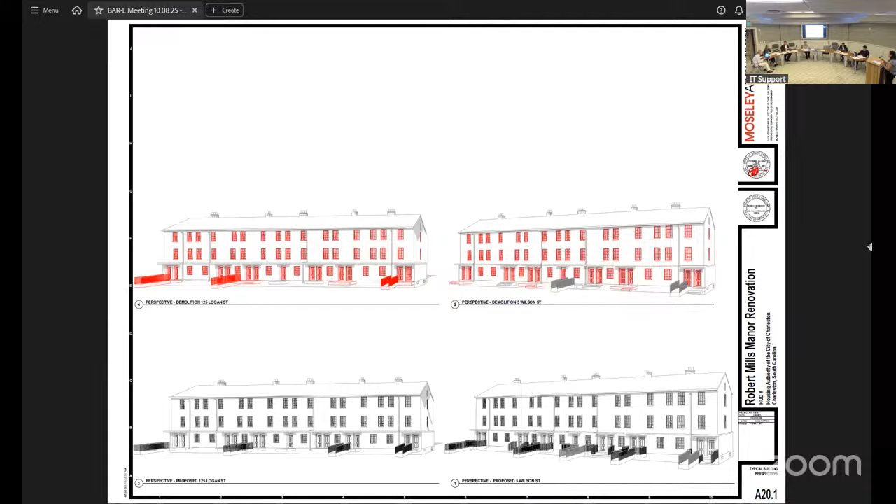I don't remember if you said, do you screen those units, I mean the water heaters, or you don't? Yes. Lawrence, I don't know if you could flip back to some of the photos where those screens are visible. I know they're early, okay, that might take 10 minutes.

They are currently screened and we plan to basically replace the fencing in kind. We want to make sure that we're simplifying that screening as much as we can while still screening all of it.

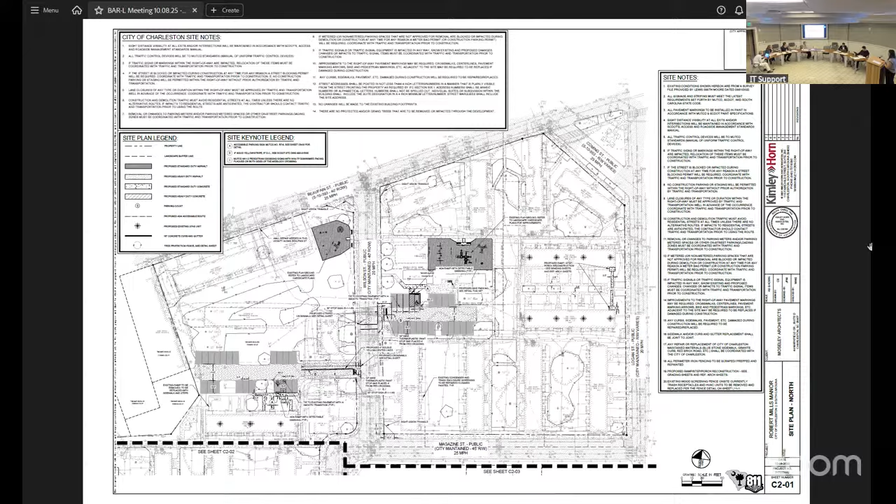Is it tamper proof too, right? Well, anyone can get to this. Sure, yeah. They've not indicated that they have a lot of problems with tampering or stolen equipment in this neighborhood.

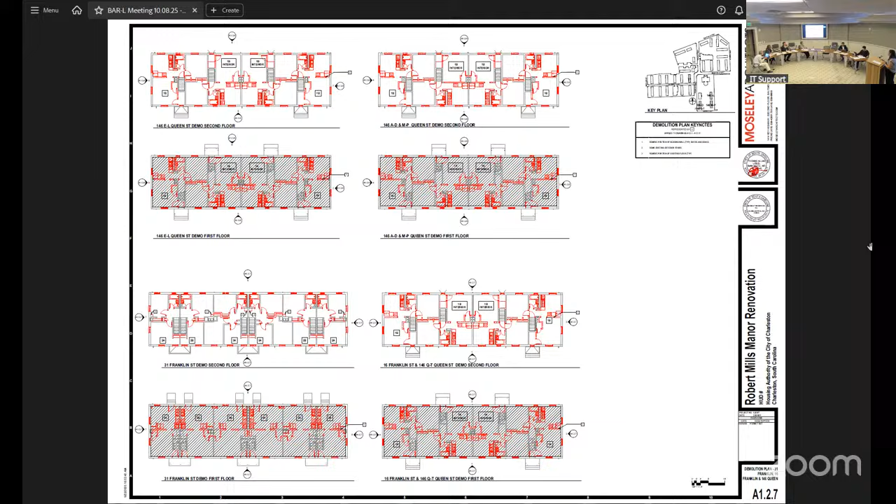Well, you can change them. Oh, tampering. Messing with your neighbors. Coincidentally, they are my neighbors.

I really want to focus on accessibility because I think it's important. But when there's an opportunity to revise the structures to make it more appealing, I think we should take advantage of that. Looking over there at 125 Logan and scrolling down Logan, it leaves a lot to be desired in that sense, but that can be discussed later.

And I'll have more questions. Okay, thank you for your time. All right, any public comment? All right, city staff, comments and recommendations please.

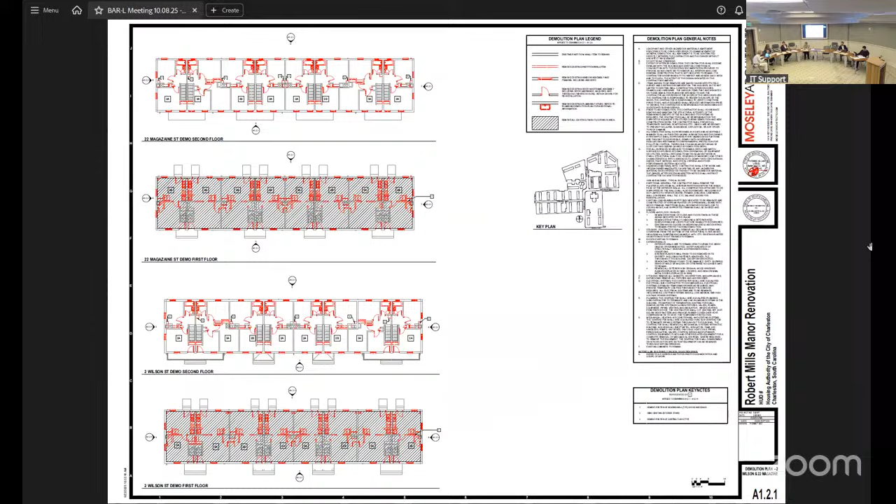I'm gonna go ahead, it may take him a while to catch up. Fair enough. Robert Mills Manor is a public housing complex listed on the National Register of Historic Places. Many of the units are built of bricks salvaged from earlier buildings on the site.

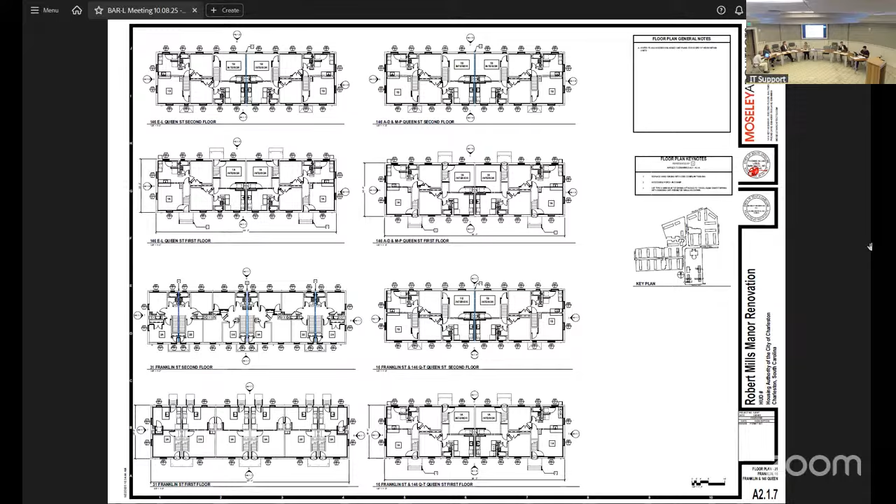It is listed as an example of the application of the social ideas and planning standards of federal public housing at the local level, and as the first public housing complex designed, constructed, and managed by the Housing Authority of the City of Charleston. While the Brockington survey did not rate much of the housing complex, which is why on the agenda it's listed as not rated, two properties within are rated: 59 Beaufain is a category 1 and 63 Beaufain is a category 2 building, hence why it has to come forward.

The applicant, I think, did a good job both within the application and in her presentation of listing the myriad of things that are either being repaired and/or replaced. So a lot of this is repair in kind or replace in kind with updated mechanicals, et cetera.

Based on site visits, staff agree that these buildings need extensive repair and renovation. Multiple departments of city staff also met with the applicant regarding the MEP scope relative to FEMA requirements and staff conditions, and the applicant's submittal reflects that discussion and agreement.

I'm happy to entertain questions that you all need, but there was a meeting of many different divisions so that they didn't have to go as high as technically required, which would have been 7 feet, and we were able to convince folks that a foot should be sufficient.

Applicant has conditional approval from SHPO for this submittal. So for staff conditions: condensing units shall be installed on concrete pads no taller than one foot, with the top of units no taller than windowsills.

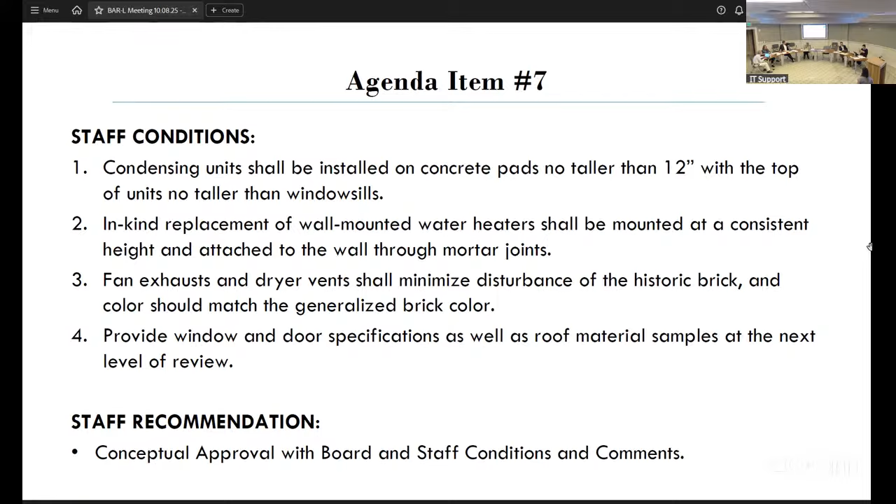Thank you. Mr. Trantham, how do you vote? Yay, in favor. Mr. Brown? Yay, in favor. Ms. Subchuck? I'm also yay, in favor. EDS? Present, yeah, very much so.

All right, item number 8, 141 Meeting Street. This is a category 1 building dating from 1876 to 1878 in the Old and Historic District, and they are requesting a revision to final approval of exterior renovations. Lawrence is going to show us the location, and then I'm sure we'll be ready for Mr. Schmidt to give us a succinct presentation on the scope.

The project, as it was, was all about the length, and there was so much time and attention given to that, two things got by us. We never got focused on the front of the building, and we are now, because we're going into phase 2 — phase 1 is about to be complete. We also didn't have enough research, and we've kind of exhausted our research on what the front doors were. They clearly were not what is there today.

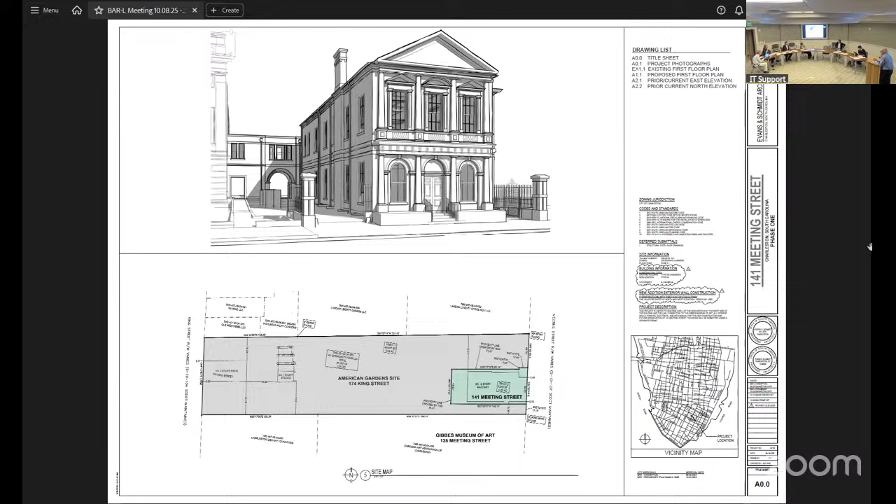Let's do the one on the bottom left-hand corner first. See the four little squares? Those are vent grills, and they backed up to the vaults for whatever reason. So we made the misassumption that there were two windowsills down there. We assumed they took out two large windows and put those little grills in.

We said let's fix that, and fixed it in the last meeting, only to find out the reason there are four grills is because that portion of the building has a little mezzanine loft, with two grills in each loft. Looking at it from the inside, we know exactly the size of the windows, and we want to put back the two windows at the proper size as a 6/6.

On the bottom level we'll restore the windows, but on the top level I'd like to keep the grills because of the mezzanine loft—it's not habitable, only 6'9". I think it's more interesting to keep them and make people wonder, since they're clearly grills. So we'll just put glass block behind it.

That's the revision we were going to do on the south. Today they've already started planting the trees—full 30-foot trees—so we're never even going to see this thing once the landscaping vegetation is done.

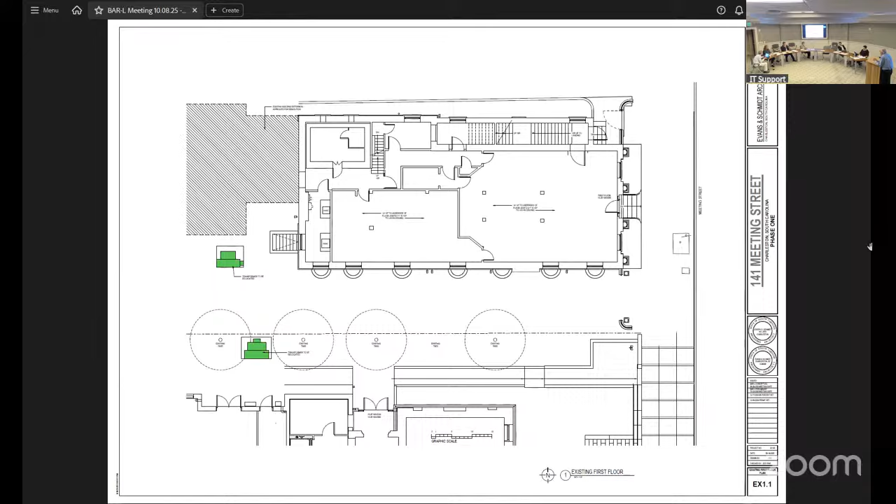That's what I was looking for—on the left-hand side, the detailing of the door. I've been doing this for over 40 years, and any building from about this period, that's pretty much how the millwork people did it: a raised pattern with a raised panel door, but they wouldn't tuck it in—they'd add an exterior bulbous piece of trim to accent it. I think it's very elegant for this situation.

So that's all right, thank you so much. Any questions from the board? Nope, all right. Any public comment? We're getting thinner in here—not seeing any, all right.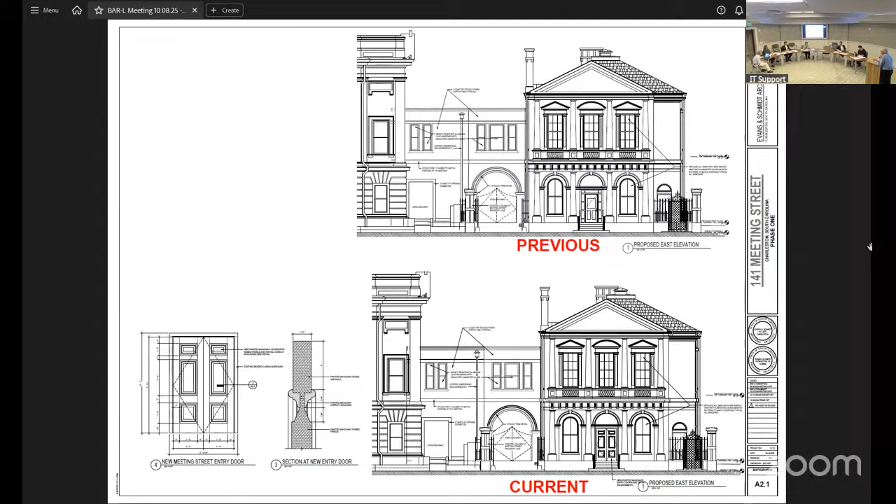City staff comments and recommendations, please. Staff are comfortable with the proposed changes to fenestration and the main door based on a preview meeting with the applicant before this application. We have no conditions for this revision, and our recommendation is approval of the revision to final approval with any previous conditions and final review by staff of the permit revised drawings.

Thank you so much, any response? None, all right, thank you. I'll motion for approval of the revision to final approval with any previous conditions and final review by staff of the permit revised drawings—good door. Is there a second? I'll second that. All right, Mr. Trantham seconds.

How do you vote, Mr. Trantham? Yay, in favor. Mr. Brown? Yay, in favor. Ms. Sokol? Yeah, I'm also yay in favor. It's as written. Thank you. All over the place, man. All right, appreciate it, we're moving on.

Number 9, 677 King Street. 677 King Street is not rated, circa 2022, in the Old and Historic District, and they are requesting approval of a directory sign.

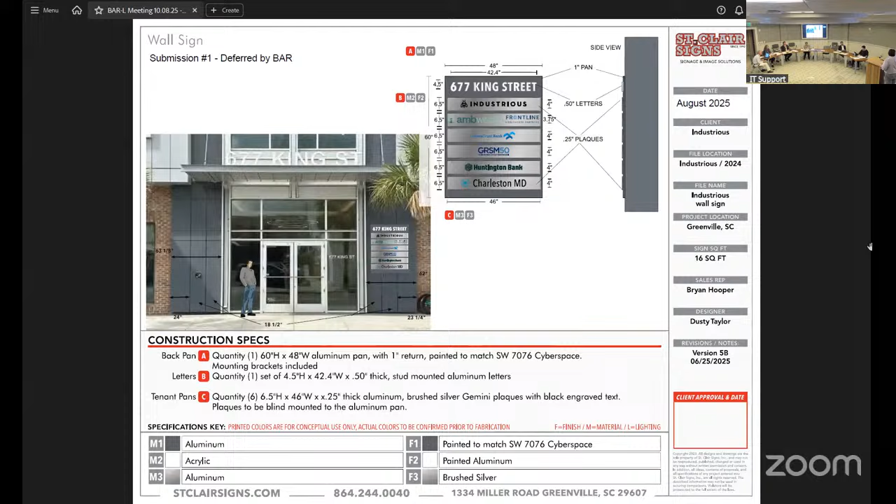This is the revised version from the last meeting. We've scaled it down significantly. I think the only thing I wanted to mention is we did play with moving the card reader restriction down further, but we felt like we've got enough space. We measured it out so the header lines up with the top of the door, and we thought that was a better touch. So I'd like to leave the card reader where it is today. Have a sign up, and with that, I'll turn it back over to you.

Thank you very much. Questions from the board? So we are not reviewing option 1 and option 2, we're only reviewing this one, correct? That is my understanding. The first submittal wasn't clear, but the first one was what you guys deferred previously, and this is the proposed. Beautiful, thank you, no more options. No, I don't want any options.

We were speaking, you were listening, right? Got it, okay.

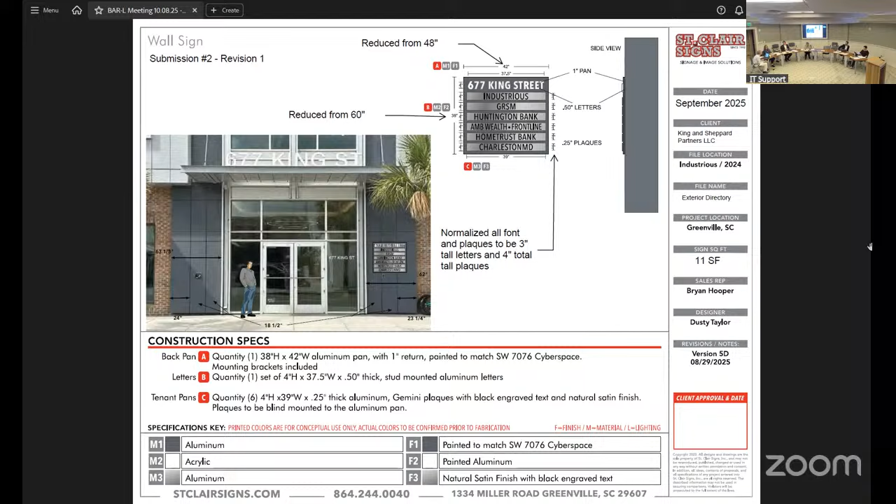Move to approve. Well, I've got to get some comments and recommendations from staff first. Yeah, we haven't done that yet. All right, Steve, city staff comments and recommendations please. Steve's not making a public comment. I love it.

I'll skip the first one, which is just a recap of the ordinance from before. The proposed directory sign was deferred by the board at the September 10th meeting this year. Both staff and board agreed a directory sign could be appropriate for this building and context. Board and staff requested the sign be reduced in size, lowered to a more pedestrian-friendly height, and designed with a uniform color palette and font without individual logos. The applicant has met board conditions: the sign has been reduced from 16 square feet to 11, lowering its placement height. Logos have been removed, and all businesses now share the same color and font. Staff recommendation is approval with board conditions and comments, with typical staff review of the permit revised sign submittal drawings.

Any response? Sounds great, all right, thank you. Any discussion? Hearing none, I'll entertain a motion. It's now your time.

Approval with board conditions and comments and staff comments, with typical staff review of the permit revised sign submittal drawings. You got that one? Yes. Is there a second?

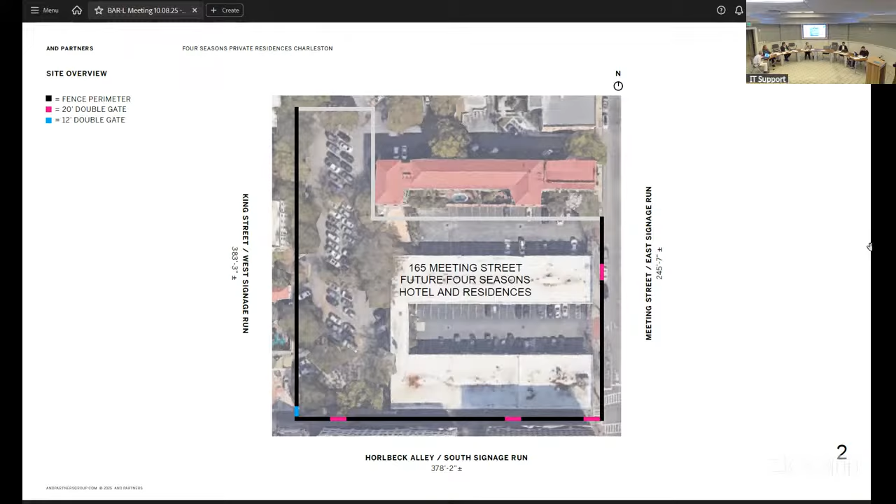There's basically a pattern, it goes A, B, C, D. It's effectively a black screen with some Four Seasons branding, but I think it's minimal and actually quite elegant. If you go to the next slide—only 5 feet tall?

It should be, I think. Yes, so I think the fence is a little bit more than 5, but the mesh screen is 5 feet. There's a construction barricade underneath it that sets it up. So it's basically installed on barricades or a chain link fence.

So this is just what it looks like in large at Four Seasons, Charleston. That's panel A. Next, panel B. Next, C, and then the next one is D.

Quite frankly, I've never presented anything like this. The signage code has always been a little confusing to me, but I reached out to Brad. I said, we've got this pretty significant fence screen we want to do, and it's technically signage, what do we do? He said we don't really have something at staff level we can approve for this, it's not really covered, and most people just kind of do it, or shame on me. But I think this is a good solution. I live next to a really big construction project on King Street that doesn't have any screening, and it looks really bad. So I think this is a suitable solution, and I'm here to ask for approval from you all tonight.